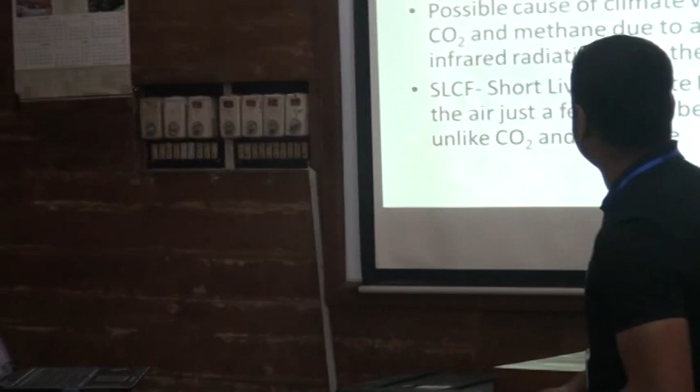We mostly spoke about black carbon and how it impacts us. It's mostly the visible component of smoke, or what we call soot. It is also a short-lived climate pollutant which stays in the air for a few weeks, and that's why it's a big concern right now. So we are doing a few things to take care of it.

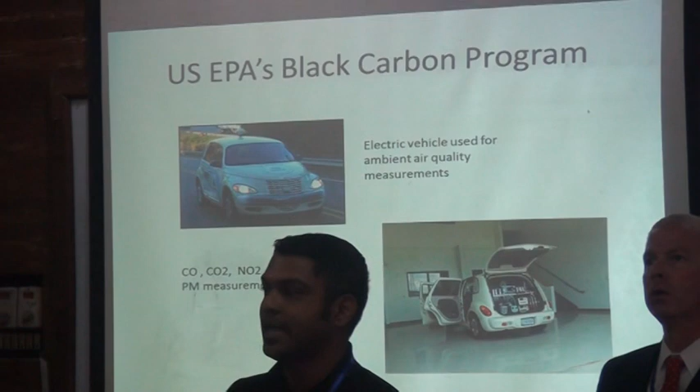The US EPA has a very specialized black carbon program where we use a completely electric vehicle. Chet showed this in his presentation too. This vehicle is completely electric, and we actually have a number of instruments set up within it. We go to different cities, different places to take measurements, mainly near road, near highway. Apart from black carbon, we also do CO, CO2, NO2, and PM. And we've done tens of studies so far in many different cities, areas, and ports as well.

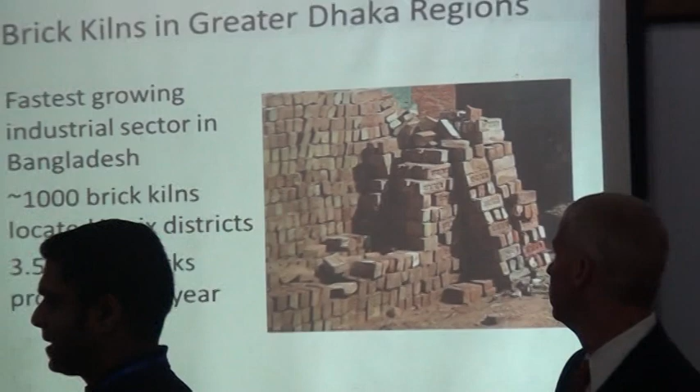Alright, just a few things about the kilns in the greater Dhaka region. Most of you know these things already, but Bangladesh produces many bricks per year, and there are more than 1,000 kilns, many located close to our site. So, a big part of the economy of the greater Dhaka region. Alright, I'm going to switch to details of the kiln background. And I'll try and use the mic here so everybody can hear me.

So the brick kilns, obviously the primary fuel source for the bricks being produced here is coal. Coal really is a fairly dirty fuel. If the temperatures aren't exactly right, or if you've got air leakage or cold spots in your coal combustion process, you're going to see black carbon being produced as a soot particle. Along with that soot particle are other pollutants, like what Chet mentioned. Mercury is one of them. SO2, NOx is another one. The oxides of nitrogen, all of which can contribute to acid gas. Acid gas is being generated from these brick kilns.

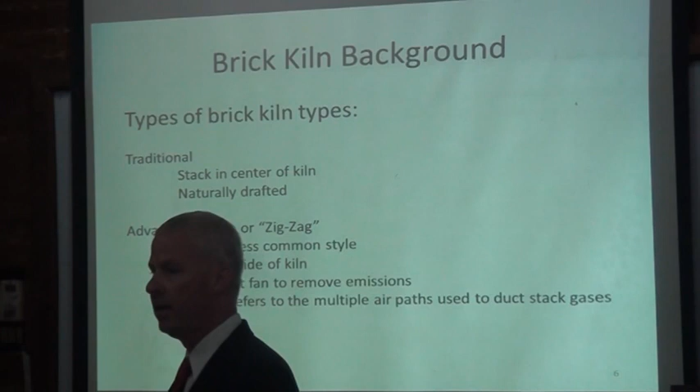So we've been here almost 2 weeks, and we were able to visit two kilns. The one is the traditional kiln. It's an older style. The stack is in the center of the kiln, and it is naturally drafted. So just the heat of the combustion process will carry the gases up the stack along with the black carbon, and doesn't require a fan. It's just a naturally drafting process like a fireplace or a wood stove.

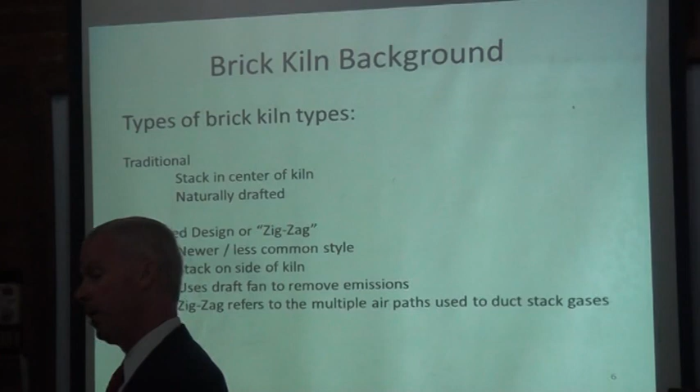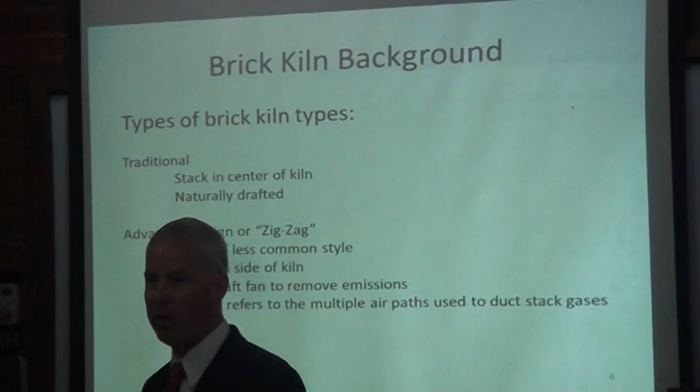And we visited a more advanced design, or what they call the zigzag style. And this is where the stack is on the outside of the main facility, and they use a draft fan to help remove the emissions. And because it is a newer style, and because of just the design process of the kiln, it naturally lends itself to lower emissions.

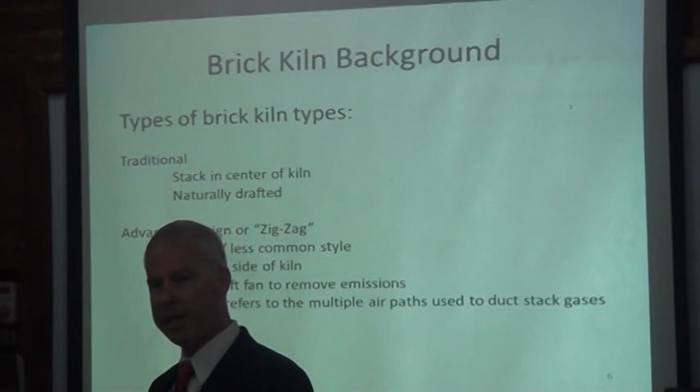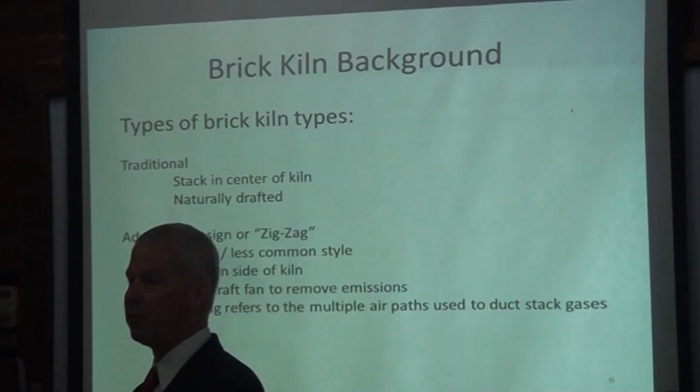These potentially can contain a water layer inside that the vapors or the gases are pulled through, which can help deposit acid gases and control some of the black carbon emissions. And the zigzag really refers to the multiple air paths that the sample travels through. And so it allows possibly a lot of the emissions to be controlled just through the geometry of the facility.

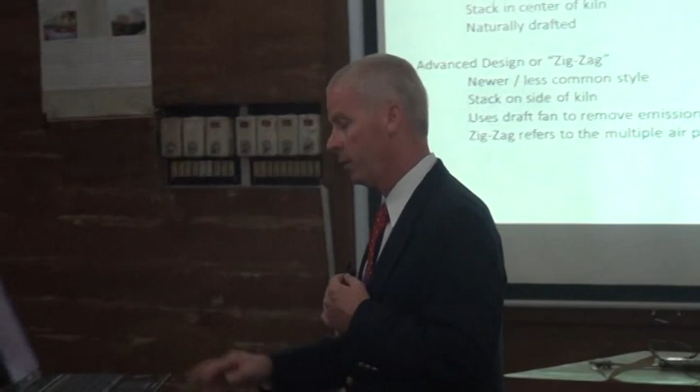So I'd like to share with you some slides that we took at the brick kilns and just walk you through the process and show you some of the things that we saw during our trip here. So my first slides here are going to be just showing some of the stack emissions, and just to give you an idea of what we saw and what we observed, and try and correlate that with the emissions data that I'm going to present here in a few minutes.

These other slides, a majority of this is water, but even with a white plume stack like this, we still have a number of emissions coming out. So it's black carbon and fly ash particles. So fly ash particles are primarily composed of silica, silicon dioxide, and iron particles are the primary pieces of this plume here. Again, as we said, there are other heavy metals that are present, such as mercury, cadmium, lead, chromium, and a number of other things. Potentially calcium, there's oxides of nitrogen, and sulfur dioxide.

It might be worth pointing out that in coal, because there's all the sulfur in the coal, the mercury is actually combined with the sulfur to form a mercury sulfide compound. And mercury sulfide decomposes at around 700 degrees C. So if you've got mercury sulfide in there and you've got the temperatures in your process, you're going to be decomposing that mercury sulfide into some mercury compounds that will be coming out.

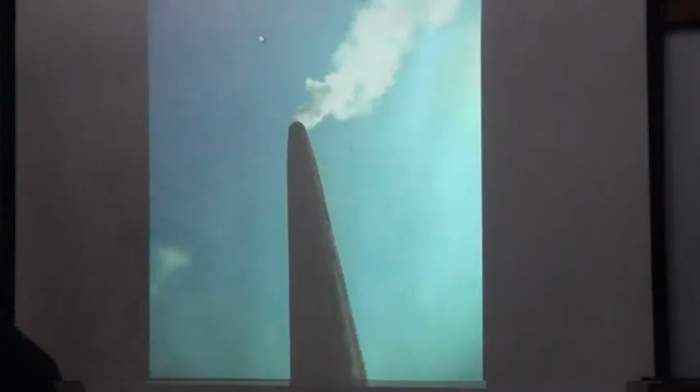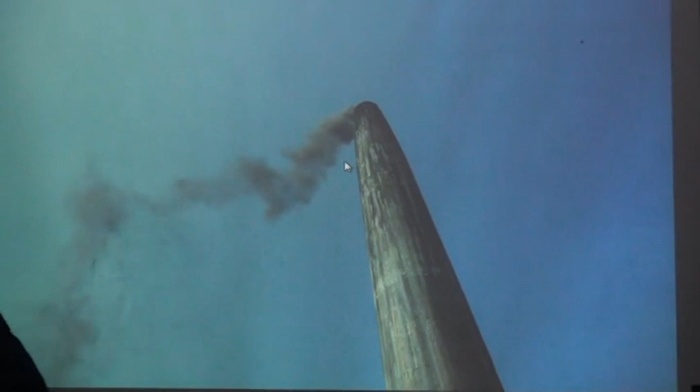So this may be the same stack, I believe it's the same stack, under some more rich conditions. And here you can see the black carbon starting to form. You can actually see the very dark emissions coming out. You can see where it no longer looks like steam coming out. You can actually see where the steam is dissipated, and you can actually see just the black carbon plume continuing downstream.

Again, here is an even darker example of the stack with the black carbon coming out. This is what we found to be indicative of very incomplete combustion. And really, it's a waste of coal. If we could learn possibly to stoke these units more efficiently, the operator could see the economic benefit of not buying as much coal in the future, and we would reduce both black carbon emissions and reduce the amount of coal consumption necessary to fire the bricks.

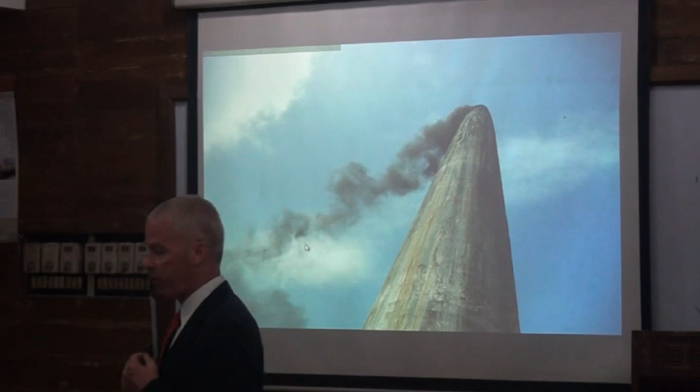Again, even darker. This is potentially directly after the unit was stoked. And so here again, I'm not sure if this is a zigzag design or not. That's okay. So this again, you can see the white plume coming out the top. But again, it may look like there's not a lot of black carbon there, but as we'll show you the data here in a minute, there's actually quite a bit of black carbon still being emitted from these stacks.

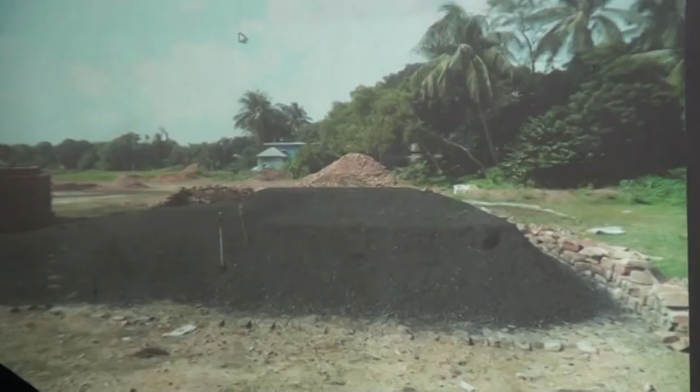Again, coal. This is the coal being used in our traditional kilns that we sampled at. This is the traditional kiln. Again, this is the stack in the center with the bricks being fired around the outside of the kiln.

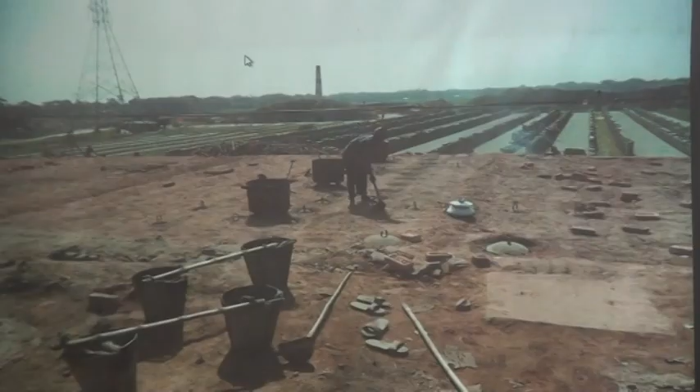This is the top of the traditional kiln, and these are coal buckets that are brought up to replenish the coal that's being dumped in. And I don't know if I can show you in here. These are the ports where the coal is being emptied.

So, they'll begin firing at this end, and around 24 hours after this section has been fired, they will remove these ports and move them further along the kiln, dig up a small area where they can apply these coal dumping ports, and then the guys will seal the ports up with a dirt surface to try and control in-leakage, and coal will be dumped into these ports around every 10 to 15 minutes over a 24-hour period.

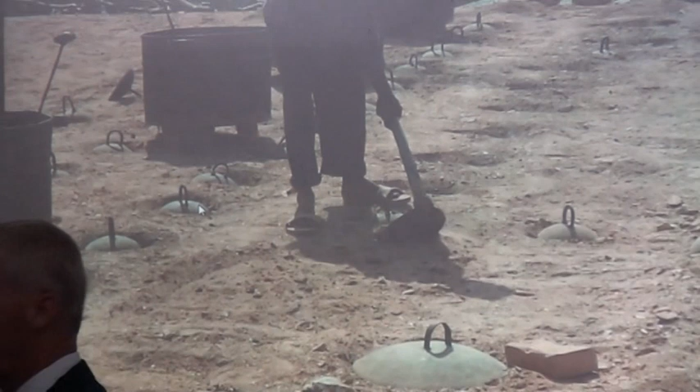This is a 24/7 operation, so there's guys morning, noon, and night that work in maintaining the temperatures inside these kilns to make sure that the fire does not go out and that there's nice uniform firing of the bricks throughout the process. So here again you can see the coal ports and the unfired bricks in the yard.

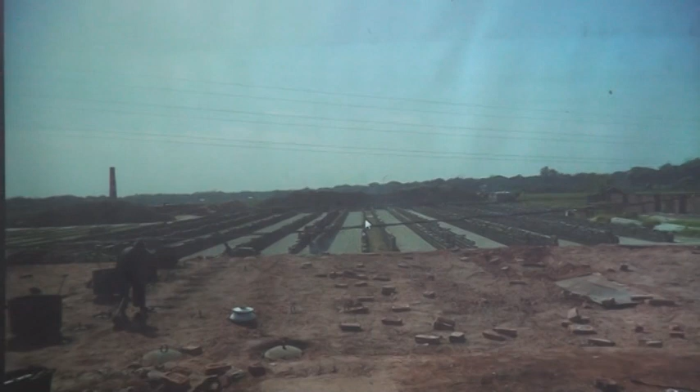So each kiln appears to hire around 50 people at a time, and many of them were making bricks during the day so they could be dried in the sun, and then adjustments were made to make sure all the bricks were uniformly dried before they're stacked into the kiln.

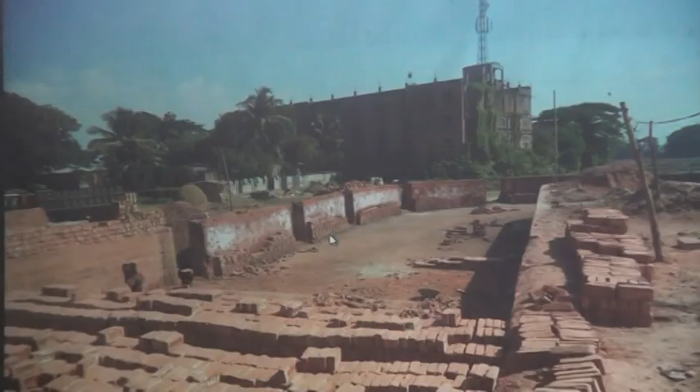Here you can see these are fired bricks down here at the bottom, and they would be firing here on the opposite side and loading in new bricks. So as fired bricks are being removed, a team is working to replenish the bricks on the other side and continue the process. Here are bricks being unloaded from the kiln. They are either stacked out to the side or loaded into trucks to be sold.

Here are new bricks being loaded into the kiln. They'll start with a layer of fired bricks to hold the bricks off the ground, and then they will stack the raw bricks into the kiln. And then this entire section here will get covered in a dirt layer to seal the bricks in and provide a uniform temperature profile for the firing of the bricks.

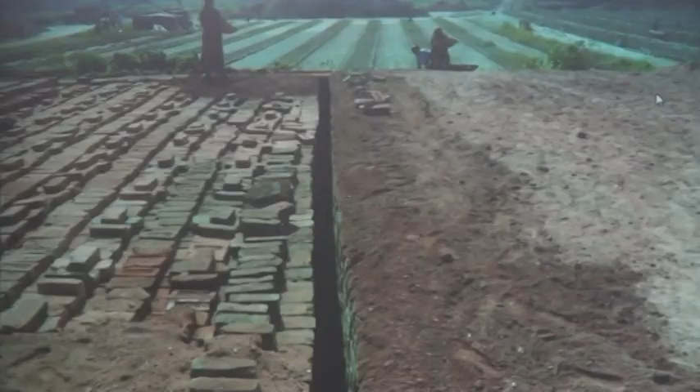It may be noted here, the bricks go in looking very gray. Obviously, a very high iron content in the bricks, which turns the bricks from a gray color to a red color, from the iron in the brick going from possibly an Fe2 state to an Fe3 oxidized iron state, and gives that red color to the bricks.

So the bricks are fired in sections, and they will seal off sections while they're being fired, so they can load in new bricks. You don't want too much in-leakage of air because that cools too much of the brick, and would be pretty much a waste of coal. So the kilns try to be very efficient with how they add coal, but it's still a somewhat inefficient process. Again, you can see here sections that are being covered, sealed away from the air, while other sections are being fired.

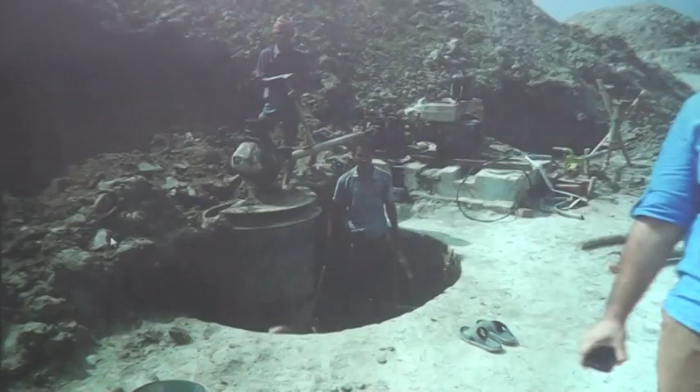So the brick starts out really from a pile of mud, and they've got these diesel motors connected to a mixing machine. The mixing machine will mix the clay properly until it comes to the right consistency. The brick making material is extruded from the bottom of this mixing machine, loaded onto carts, and then taken out to the field where they will drop it into molds and create the brick pieces.

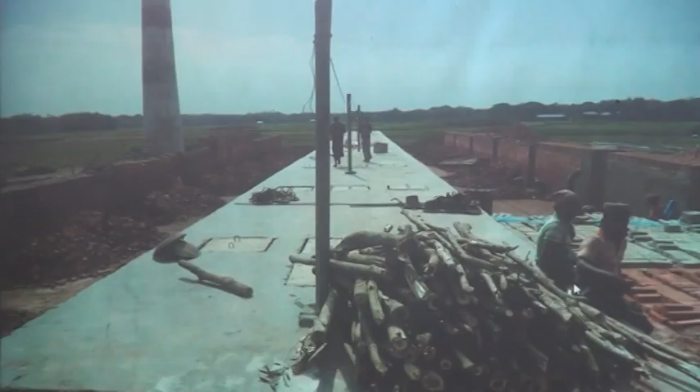Along with the coal, because like I said, the coal does not burn instantly by itself, some amount of wood or some other combustible material is necessary to get some temperatures going inside until you can get a high enough temperature to get the bricks actually to fire. Here, bricks being dried in the sun.

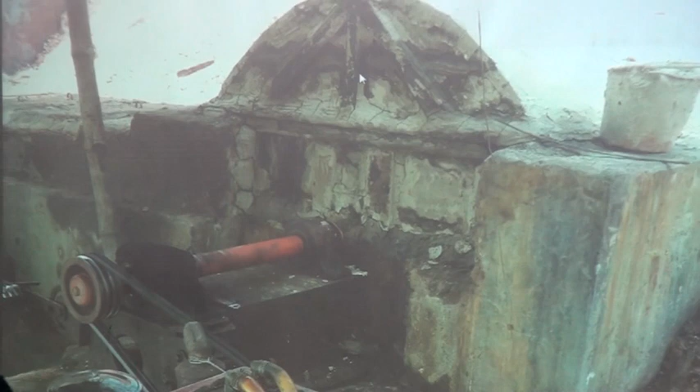So as I told you, they've got two designs: the traditional design and the zigzag design. In this kiln, they use a draft fan. It's basically a fan, it acts like a pump. So it'll actually move the air out of the kiln and drive it up the stack. And they use a diesel motor connected with pulleys and belts to drive the fan.

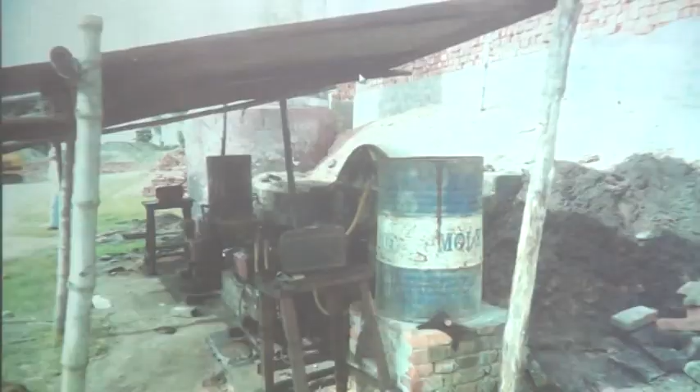This one has two diesel motors and a cooling water tank. And I'll try and show you some more of that. So this is basically the radiator for the motor. As one motor gets too hot, they will shut it off and switch over to the other, so they can maintain 24-hour airflow through the device.

The zigzag design, because you're pulling gases down away from the combustion process versus them being naturally drafted up, requires a fan. As heat rises and cool air sinks, it's the same way in a brick kiln. You have to have the motor to get the gases to travel the wrong direction. But we believe that this is the more efficient design, though it does require some sort of motor or mechanical process to get the gases to move. Again, another picture of the fan.

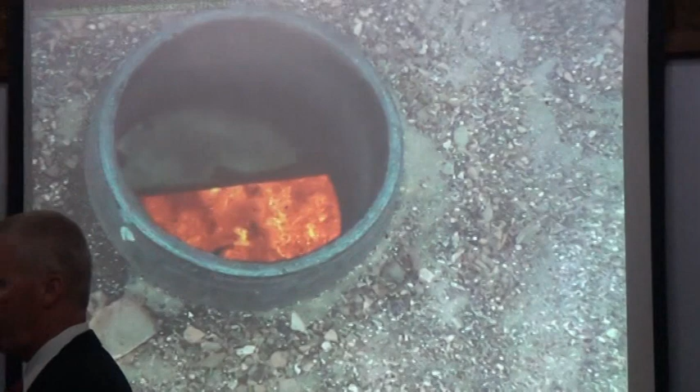Here it is looking inside one of the ports. We didn't get a temperature measurement, but we estimated these were running at around 600 to 700 degrees C inside the kiln, based on the color and what we've seen before with coal combustion. Again, another view inside these coal ports.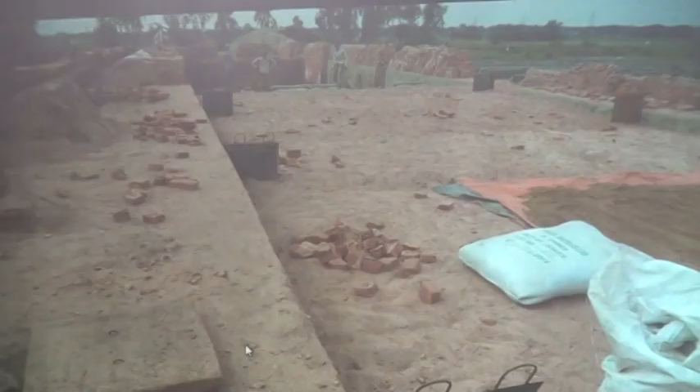So this is one of the coal piles of one of the sites that we visited. Here, this is a higher grade grind and possibly higher grade coal than was being used in the previous site, possibly also increasing the efficiency of the kiln through better combustion.

And this facility, despite it already being fairly finely ground to begin with, goes through a second grinding process. They've got a diesel motor off to the side, and then the grinding machine, and then their fine ground coal in here. It was very fine, almost just like baby powder. Fine ground coal. And this is the final product being used to fire the bricks at this facility.

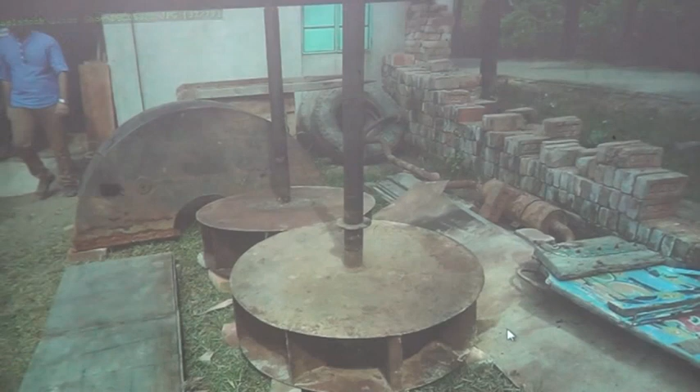Here are the fans that I was talking about. These are the actual fans that are used to move the gases. Some people may call these blowers. These are vanes that help capture the gas, just like a fan, just like the fans up here. Just an axial design versus a radial design. As we observed, these things operated around 1100 RPM.

And just to point out, I'd ask Dr. Salam as we rode to the plant every day, we would pass these piles of brick, and I'd see these people with grinders, grinding brick. And they were very careful to size the grind, and they had very beautiful piles of this fine ground brick. And as we understood, it's actually used in the asphalt road base or as aggregate.

Because Bangladesh, at least in this area, does not have a lot of rock or stone that they can use, and it's very expensive to import. Much easier to take broken bricks that wouldn't normally be sold and turn them into another product here. I thought it was a really good use of the material that was not able to be fired or be used as a whole brick.

Dr. Salam has been great to us. He's allowed us to use his laboratory to perform our initial calibrations and our post-calibrations and to store our material here. We had originally planned to come back in January, almost a year ago, and Dr. Salam has had our equipment for some time now. We're very grateful to Dr. Salam for allowing us to keep our stuff here safe, so we were able to show up, and for providing us with a chemistry laboratory so we can work on our equipment and really get this project started.

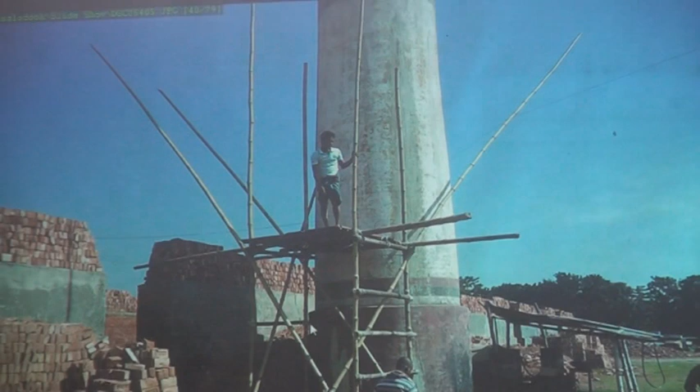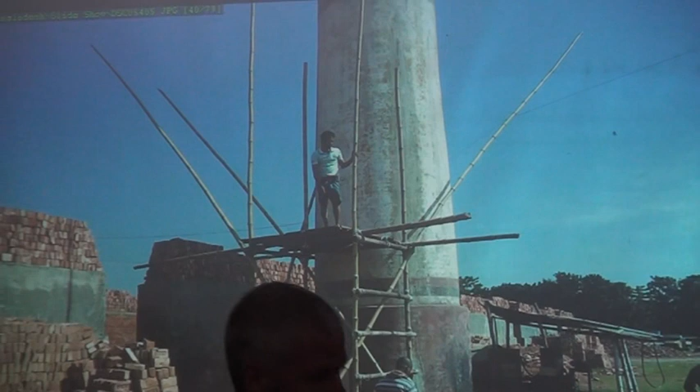So just to talk about some of the technical difficulties, this picture almost says it all right here. For typical stack sampling, we require some sort of port to be able to get our probe in. We've got a very long probe that's supposed to be able to reach the center of the smokestack, and it normally requires like a 6-inch hole on the side of the stack where the probe is inserted and where we can draw the gases out onto a filter for sampling.

And so our great host was able to construct some scaffolding for us, but unfortunately we were unable to get a hole built, and we were concerned for a couple different reasons. We hate to ruin the stability of the stack by putting a large hole in this kind of facility. But thank goodness they actually have a hole at the bottom of the stack. I would assume after monsoon season there could be quite a bit of water in the bottom of the stack that had collected over the 6 months when it was very rainy, and they needed some way to